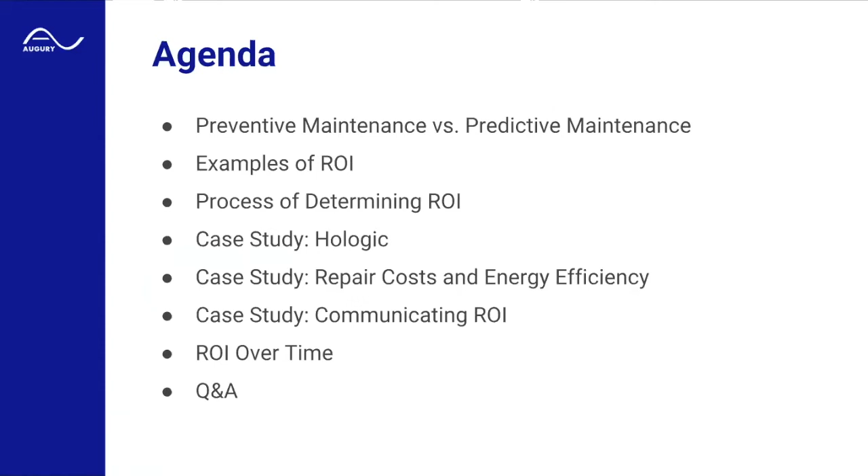So first, I'll talk about the differences between preventive versus predictive maintenance. And this is really relevant because the process of ROI helps you quantify the benefits of moving from PM to PdM. And as you can see from the chart, even though it may seem like a subtle jump, the ROI can actually be financially material for an organization if the project is structured properly, right? So up to 10 to 100 times cost savings in going from reactive to predictive maintenance, and 10 times cost savings going from preventive to predictive maintenance.

And the reason why you may not have been seriously considering predictive maintenance in the past, which is up here in the ultrasound, magnetic, and vibration and oil analysis area, is mainly because in the past it was a very expensive investment, very time consuming, required a lot of skill to implement, and just the cost of sensors was very high. Nowadays that's dropping dramatically, so that it doesn't make sense only for the jet engine industry, but it makes sense a lot more for the commercial and widespread industrial industries.

So preventive maintenance is a time-based maintenance program. Predictive maintenance is a condition-based maintenance program. So time-based versus condition-based. And we'll get into how that actually affects your ROI.

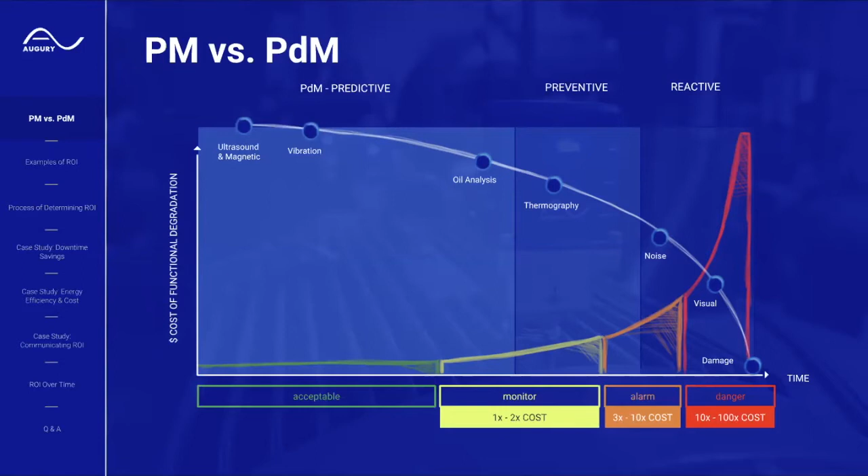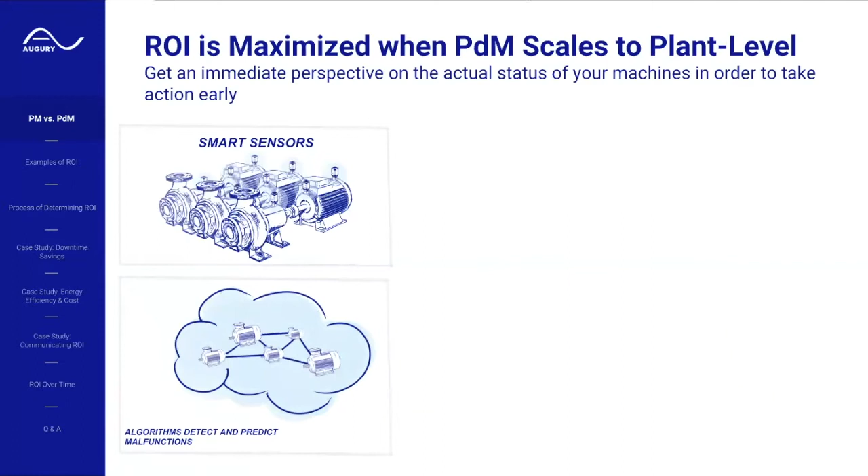And what I want to focus on here is that predictive maintenance is not just smart sensors. It's a holistic solution that is maximized when it's implemented at the plant level. So having individual insights on the condition of a machine not only gives you insights on the machine, but when it's scaled out to the site level, increases the opportunity for additional ROI. So comparing various machines within the plant to one another highlights opportunity for additional ROI and helps you uncover best practices amongst various areas and then propagate them to the rest of the plant as you find them.

It also helps teams keep engaged and improves communication between operators, maintenance professionals, and engineers by tracking those uptime and maintenance metrics that we're going to go over in a little bit. So expanding to the site level helps you prove out the ROI that you come up with in the investment calculation, but it also helps you find hidden sources of ROI that you may not have been aware of before making this investment. And we'll go over that in a real life example later in this webinar.

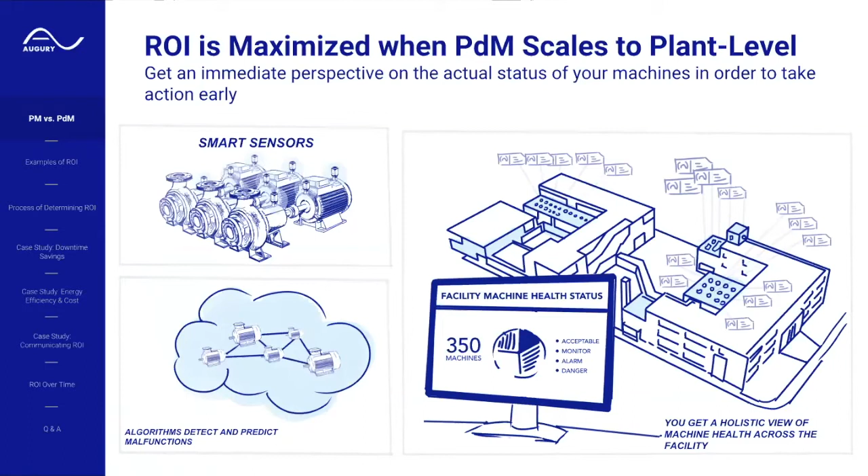So why should you care about coming up with a rigorous process for calculating ROI? And bottom line, it's because you don't want to invest in projects that lose money, right? So proving out ROI not only prevents a poor initial investment, but it actually can help an organization track performance during the project's duration, right?

It clarifies the metrics to watch, and it helps the organization and the people within it know how they're constantly performing against those initial calculations. And so it'll let you know when those metrics are in or out of spec, right? So really the old phrase, if it's not measured, it's not going to improve, applies a lot here, and is a lot of the value of going through the process of formally putting an ROI value on a predictive maintenance investment.

So when we talk about ROI, what does that mean? ROI, return on investment, can mean lots of things to lots of different stakeholders. So I want to get them all out in front of us on the table right now before we jump in and start defining more specifically ways that I found it to be effective.

So for example, you may have heard from a finance professional that the net present value of this investment is greater than zero, right? And this is essentially the opportunity cost of spending money on predictive maintenance versus another project that you're considering, right? So do all the benefits and the costs today, when brought back to the value of money in today's dollars versus tomorrow's dollars, make sense? Is that greater than zero? So the finance professional might be looking at it from this standpoint, the opportunity cost standpoint.

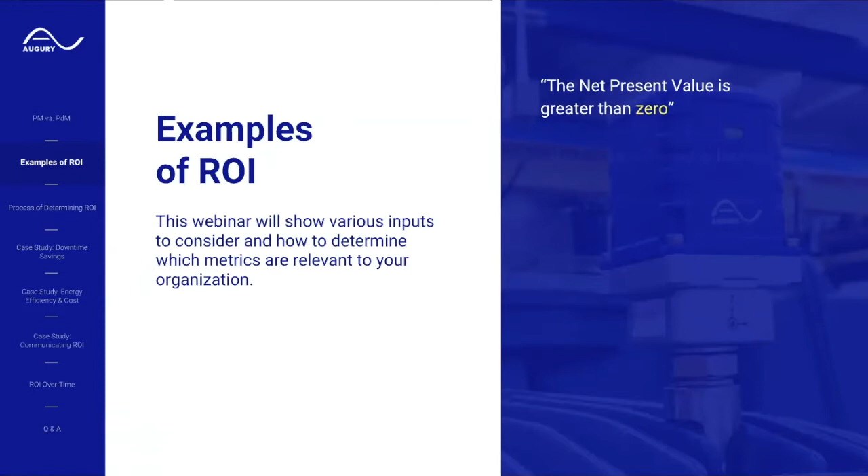Another simple way of looking at it is payback period. So the payback period is less than 8 months, right? So this is the time it takes for the dollars gained to equal or exceed the dollars invested in a predictive maintenance program, right? And the beauty of this metric is that it's very simple. It's very easy to understand, and therefore a lot of plants will have a heuristic like things must pay back within 2 years to make sense. It's a very simple and easy way of measuring ROI and making decisions.

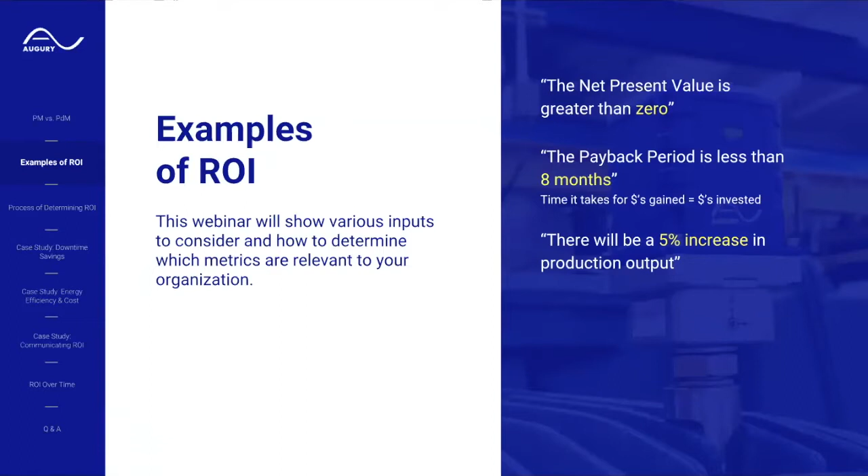Another thing you might hear is that production increases will be 5% if we invest in this predictive maintenance program. Now, this one is purely focused on the output. And even though it's less considering the initial investment, it highlights the fact that people care about how this is actually going to change what I'm producing and how is this going to increase revenue or reduce my costs.

Another one is percent payback on a predictive maintenance program. So we will see 165% return over the cost of this program. This is typically the one that I like to focus on, mainly because it's simple and it's easy to calculate. It's gain minus the cost over the initial cost, right? So the difference between what I gained and what I put in, over what I put in. So we're going to focus on this mostly in some of the spreadsheets you'll see later.

And the last one I want to mention is similar to an output metric that we saw with the production output, but in this case, it's a repair cost declining by $92,000 over the last year. So this is another example of an output metric that someone might want to track.

Now I'll go over the process of determining ROI as I see it, and a way in which I found it to be very useful for various different stakeholders. So I try to break this down into a 5-step process of determining ROI when investing in predictive maintenance. The first step is really understanding the problem. So determining from historical data a baseline of your current situation at your plant to really get a sense of what is the potential ROI going forward. So understanding the current problem and your current state of affairs at your existing location.

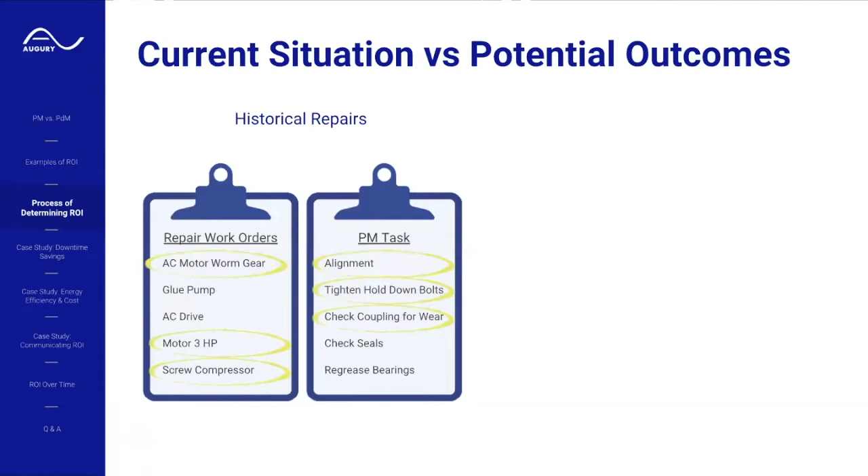Where can condition-based maintenance activities have eliminated the need for a preventive maintenance task, for example? And then how much can that change? Can that be changed or be reduced, right? So once you have the historical data and you look back and see what could have been affected, you can start to put numbers on the potential impact of a predictive maintenance program.

So one thing to note here is that this does not depict downtime events, and typically downtime could be a significant cost savings when you're evaluating predictive maintenance. So keep that in mind, and I will get to that later in the webinar.

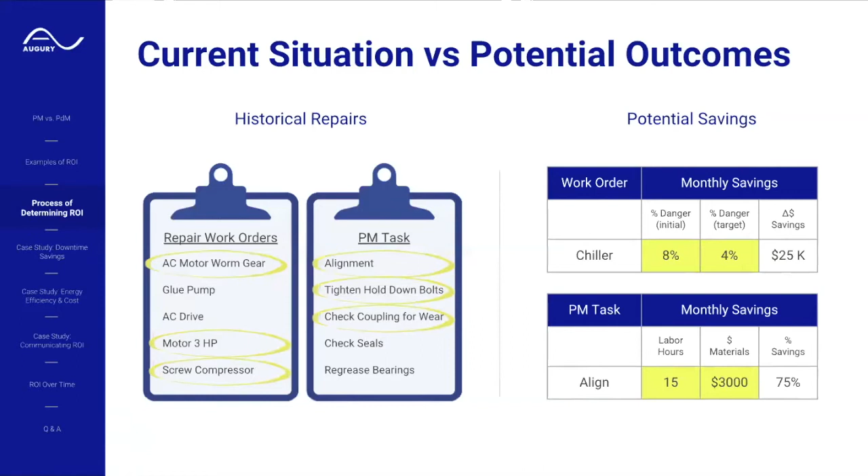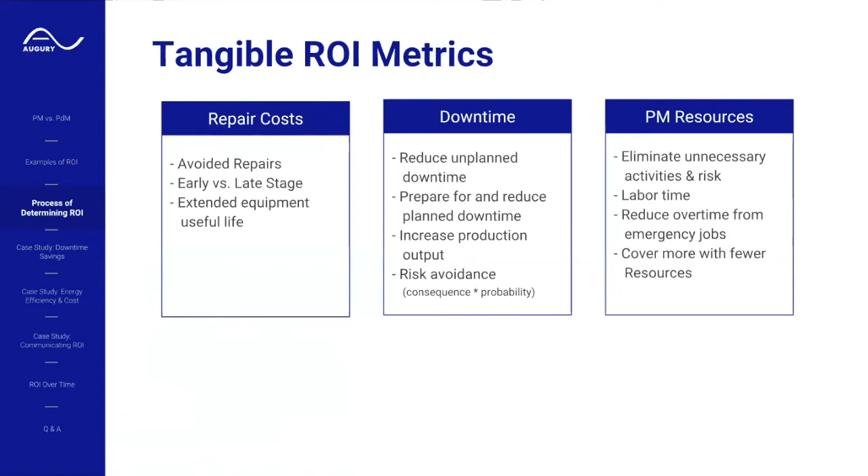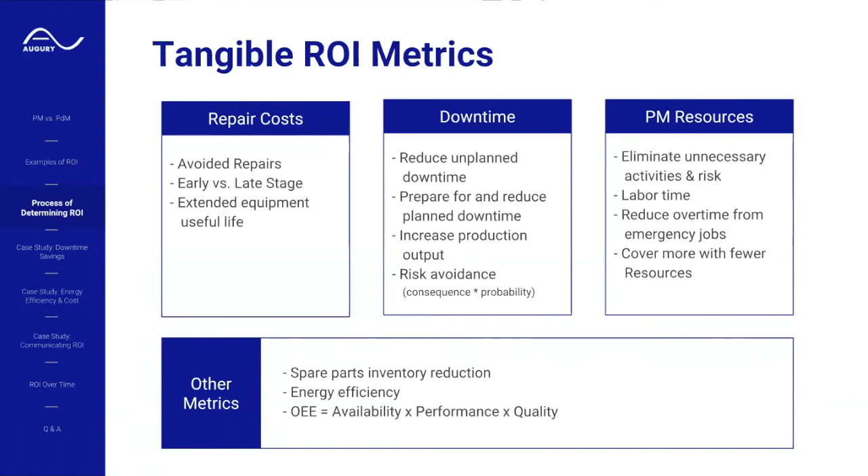However, these are not the only things that you should be considering. So whereas tangible metrics might be very easy to put a number on, intangibles are still pretty impactful when you're thinking about how to calculate and think about ROI. So first and foremost, there's safety benefits. By basing your maintenance on the condition of a machine versus on a time-based recommendation, you're actually not touching machines that are healthy when they would need maintenance according to a time-based recommendation.

So if it's healthy and it says to grease a bearing every 6 months, but the condition is acceptable and you don't need to, you're reducing the risk of a workplace injury from someone tampering with a machine that does not need work. And you're also reducing the risk of introducing something to that machine that can later cause a failure or safety incident. So you drop a wrench into the machine. That's an extreme example, but I think it serves as a good analogy here.

It's about morale and retention of knowledge. So you're actually empowering your operators to understand their machines and maintenance professionals to work more efficiently and effectively to validate their work, so that when they've made a repair, they can validate that machine has been improved in health. People retire and they take that knowledge with them. So having that stored in a solution and a platform helps you retain that knowledge of those machine experts.

A key part of this is that it's a holistic approach to your current situation, and that by monitoring these assets with sensors, you instantly get the health of your machines, without having to do an exhaustive manual assessment of all your assets. And you track this over time in real time. So as these change, this is automatically updated.

Setting a timeline is going to be key. So typically I've found 3 to 6 months is long enough to see some initial success stories in a predictive maintenance program. And it's about comparing your machines to what they are today to how they can be in the future, and doing that on a variety of inputs, right?

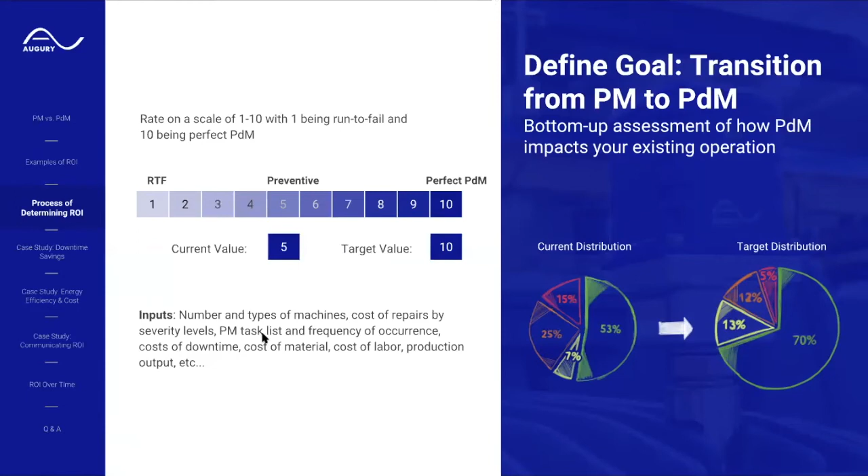Okay, so once you have your plant sort of pegged at a 1 to 10 scale and what you are today versus what you want to be in the future, it's time to actually start implementing the program. So far we've talked about repair cost savings and savings from optimizing current preventive maintenance activities. However, in most cases, that real value is going to be in higher production output. So this is reducing that downtime, both planned and unplanned.

So one thing to note here is there's always going to be downtime. You have to maintain machines at some point, but the goal is to minimize and plan for that. So Toyota, which is sort of the gold standard in terms of manufacturing, stops their lines constantly throughout the day by operators pulling an andon cord, right? But the key is that it's for a short amount of time where intense, fast improvements are made. So by having a predictive maintenance system, you can plan for those planned downtime activities.

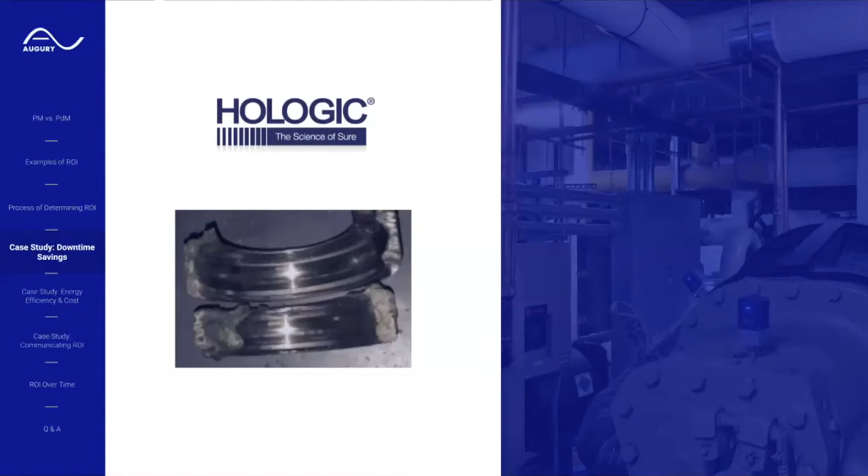And so now I'll talk about a real life example of how to evaluate and track downtime savings metrics through a case study that we've actually seen here. So I'm going to talk about Hologic, which is a medical device manufacturer. They make breast and skeletal health. So it's a highly critical facility. Things have to work and produce high quality product for human life, really. So they're a leading edge company.

They've invested in predictive maintenance to monitor their critical air handling units that are servicing the uptime of their clean room. So they have a clean room, they have to meet FDA cleanliness standards, and these air handling units ensure that this clean room stays operational. Unfortunately, there's also limited redundancy on these air handling units, and they're hard to access just by the nature of the equipment. So they chose to remotely monitor and diagnose these in real time with sensors.

And as a result of this, they actually found a bad bearing on an air handling unit and replaced it at a planned interval, right? Instead of firefighting and having the plant be down at an unexpected time, they were actually able to proactively get in front of this and make this improvement at a planned time.

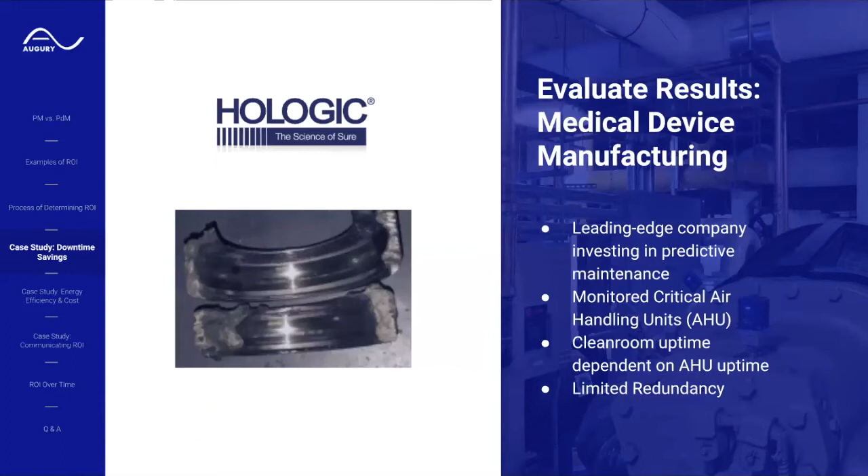So what is the impact of being able to track and update your model in real time after you find a success story? And so what they did here is they essentially saved $53,000 in downtime by getting ahead of that problem with their predictive maintenance system. So the way they figured, with no spare motor available, this could have resulted in a clean room downtime of up to 3 days.

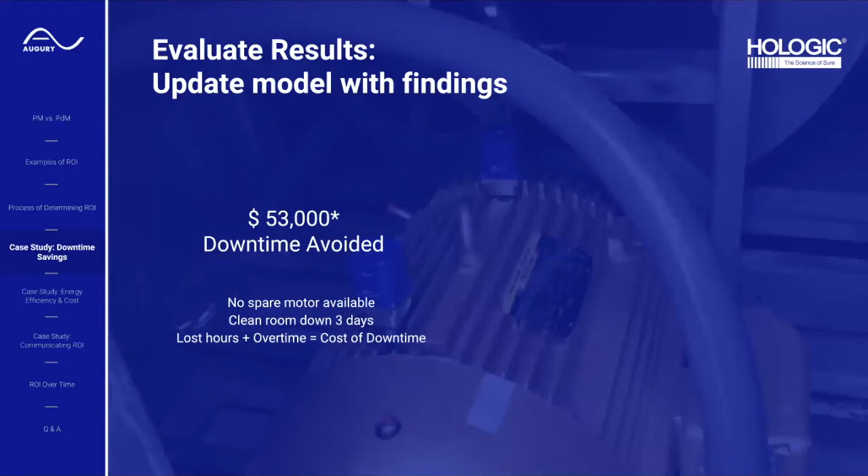And so when adding up the lost hours of production to get the clean room back online, plus the overtime cost of doing that, they get to about $53,000 in avoided downtime, right? So they implemented that into their ROI model and updated that going forward. Another aspect of that is the repair cost savings they saw out of that.

So actually by finding this problem, they found a similar earlier stage problem on another air handling unit. And instead of actually replacing that entire piece of equipment, they were able to send that out for repair and have that repaired at a lower cost than total replacement, right? So there was sort of an added benefit on a different piece of equipment with the predictive maintenance system.

And one thing to note here is that these numbers could have been drastically different if this was detected at a time closer to the end of their quarter, typically when they have higher capacity needs in the plant, right? So this could have actually doubled if this were during that high capacity time and they needed to have an unplanned downtime event.

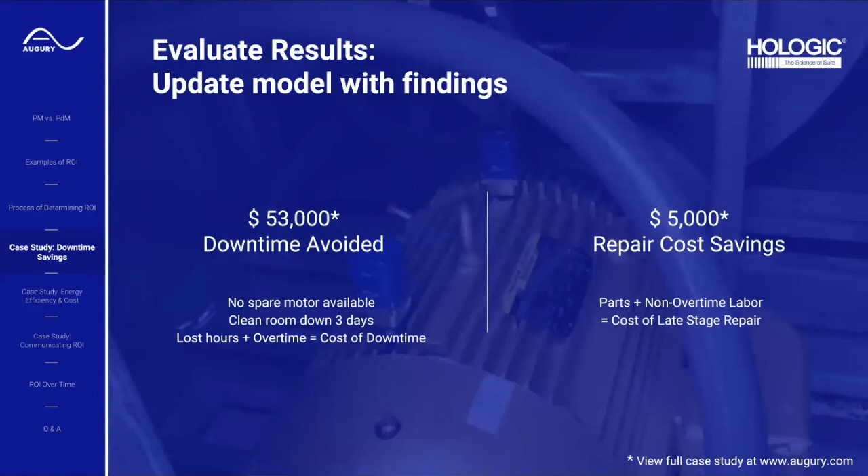They made a repair, so they re-greased the bearings. It was showing bearing wear. And then they took another recording with their predictive maintenance solution, and it still was in alarm, right? So that was pretty confusing to the team. You know, I just made a repair. Why hasn't this improved as I thought it would?

So upon further inspection, they found that the grease port for this pump was actually clogged because a year ago, someone had put the wrong lubricant into the machine, right? So the grease was actually not ever getting to the bearing. And this ended up causing the bearing to be in severe alarm, and they had to replace this bearing.

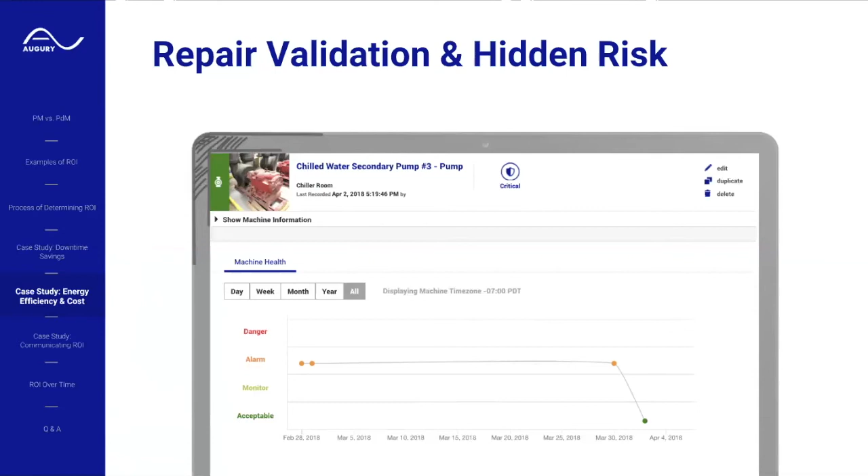So typically it's hard to calculate the ROI and the energy efficiency values of a piece of equipment. So if this were a chiller, for example, you would typically need power consumption data, liquid flow rates, temperature differences across an evaporator. But here there's a clear correlation between increased vibration energy due to bearing wear and decrease in energy efficiency. So if the machine is not operating in an optimal condition, you are wasting energy, right? So that is definitely something you need to consider.

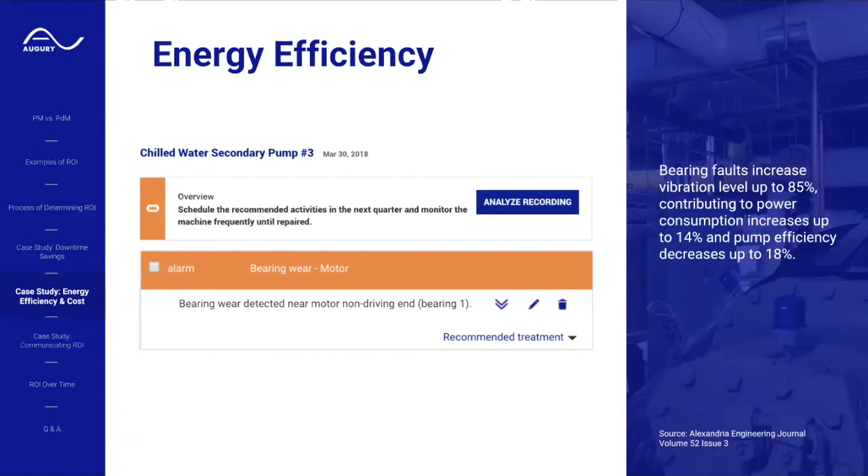And really the same theory applies to driving a car with deflated tires. You're wasting gas because you're decreasing your fuel efficiency, right? So energy efficiency is something that definitely should be built into an ROI model. And there's certain techniques that you can use to correlate vibration with that energy efficiency.

So now I would like to focus a little bit on communicating the value of ROI. So now that we've gone through various ways of understanding the current and future target states of your machine health in a plant, and we've reviewed some example calculations of repair cost savings, preventive maintenance optimization, and downtime savings, I want to focus on how to communicate those savings throughout your organization.

So ROI, like I said, can mean very different things to various stakeholders within an organization. Now I'll start with an example from a bottling plant that required us to show different aspects of the same ROI model to the various decision makers, right? So it was different sides of the same coin, but it was still necessary to show those different sides to satisfy the needs of the different stakeholders within the plant to make the initial investment into predictive maintenance.

And I'm sure that as you go through your own projects, you're going to have similar challenges, and it's just useful to get a little creative in how you present different data to different stakeholders. Okay, so here's a bottling facility, and really the stakeholders here are the finance department and the asset managers. That's the maintenance and the operations teams responsible for these assets, right?

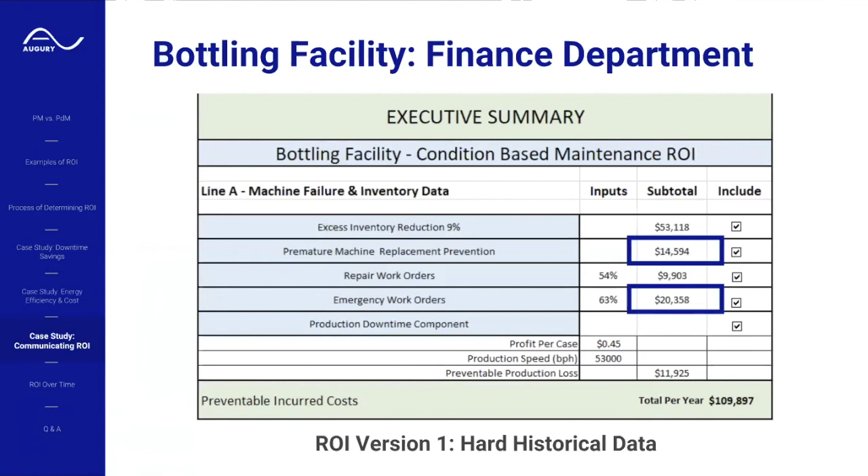So they cared about the scale, and they cared about an accurate assessment for what downtime looks like in reality, even if that varied a little bit from their historical hard data record.

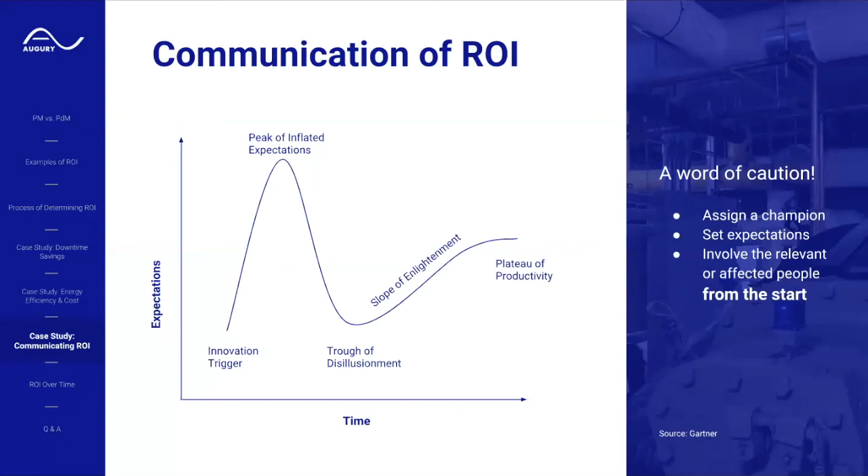Another word about communication. So ROI will change over time. As you make improvements and the hard costs decrease, so as your repair costs decrease, for example, your ROI for that particular metric will level off over time, just by the nature of improving the overall health of your machines. However, this is sort of a trap, because what you should track and communicate is the cumulative savings over time, as those will continue to increase, right?

So the analogy I like to use is the seatbelt analogy, right? So using seatbelts over the last 50 years has significantly reduced deaths and fatalities that happen on the road from motor vehicle accidents, right? So what you don't want to do is say, okay, I'm looking at a graph of fatalities over time, and that has decreased significantly and has sort of leveled off.

So now it's a good time to stop using seatbelts because we're good enough. No one is dying in car accidents anymore because it's improved, right? That would be absurd to think that. The same holds true for monitoring your machines, right? Just because you've actually made improvements and shown that costs have decreased, you want to continue to monitor those in the future to ensure that it stays at that low level.

So the intention is to have higher reliability and fewer breakdowns. Once it's achieved, you don't want to stop monitoring these, and you want to continue to communicate the cumulative savings that you see over time.

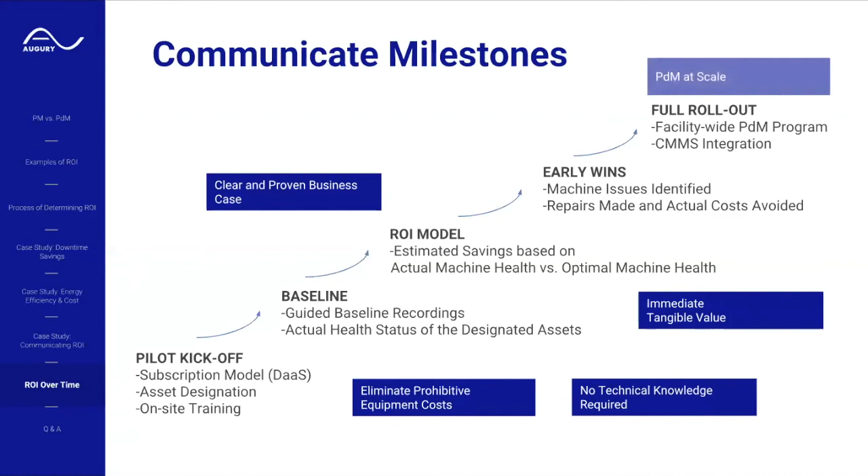Right, so you're eliminating those costs. You're reducing the technical expertise that historically was required when sensors were very expensive and skills were hard to find. You're communicating the tangible immediate value. Also, the intangibles are important. Don't forget those. And you're showing out the clear and proven business case over the process of 3 to 6 months typically to get to those first early wins. So breaking up into milestones is something your champion should do to communicate ROI and should prove out predictive maintenance at scale.

So that's it for the prepared portion of the webinar today. So to sum up, we talked about how to define ROI, what it means for various stakeholders, the various different types of metrics you can track. And then we went over real life examples of how someone has found these metrics, proven them out, and updated their ROI model, and then how to communicate that value.